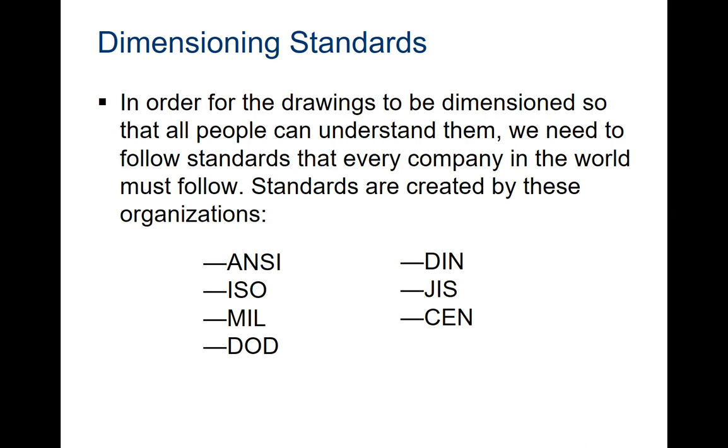That's just one example. So we have these different particular organizations. We're going to talk about a few of them and then we'll move on. So the first one is ANSI, the American National Standards Institute. Again, it's mostly engineering standards in North America, universally accepted set of rules. ISO is the international organization. This is worldwide. There are a lot of countries that participate in this. America also participates in ISO for a lot of things, but again, it's just an agreed upon set of rules.

Then we have the DoD, or the Department of Defense, and the military standard. So the DoD and military standards are going to be used obviously by the military and the Department of Defense, but also by any corporation or company that makes things for the DoD or military so that they have agreed upon sets of standards. So if company 1 is making something and they say it's going to be 1 inch in diameter, and company 2 is making something that has a hole for that part to fit in, it will actually fit. Then we go on to just some of the other ones. There's the German Standards Institute, the Japanese, and the European Institute. So again, it's just a set of rules followed by people agreeing to this set of rules.

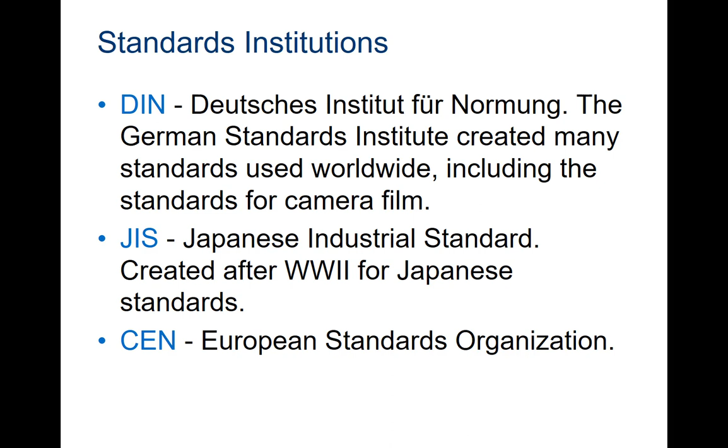Let's get back into actual dimensioning. So we have some components. You should be very familiar with these. We've got our dimension text, which is just going to tell us how big something is. Your dimension lines, which are going to be on either side of your dimension text. There's going to be an arrowhead at the end of the dimension lines to indicate, hey, the dimension starts and ends here. And then finally, there'll be extension lines that run from your dimension lines down towards the object being dimensioned but not touching it to specify that this is the part perimeter where the dimension is actually starting.

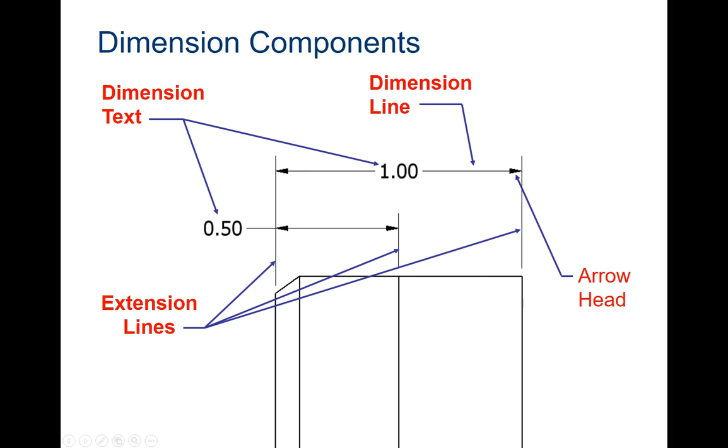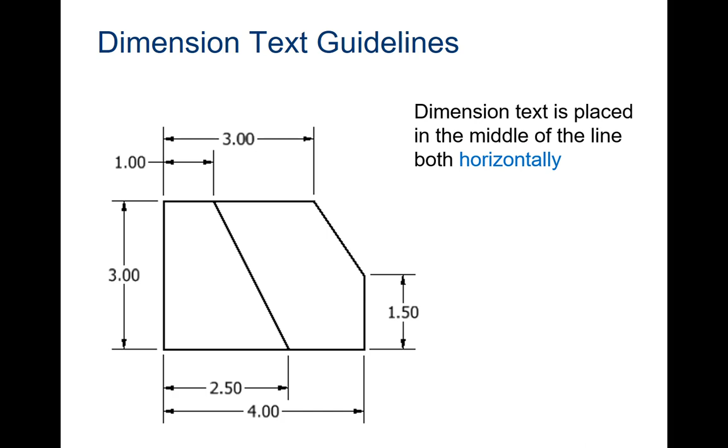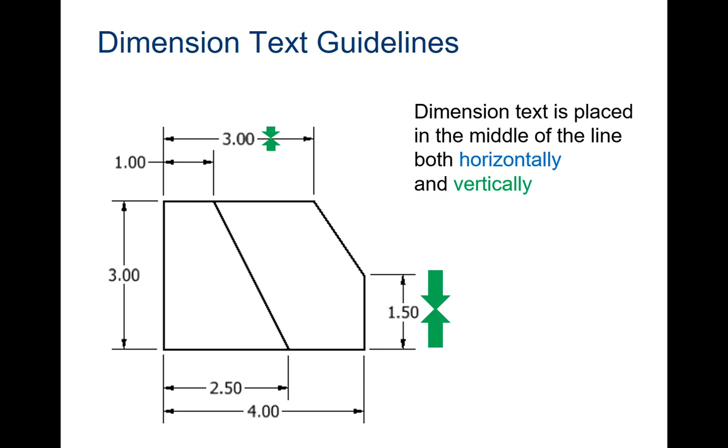Some of the guidelines for text. The text should always be in between the arrowheads, both vertically and horizontally. It can go outside of the arrowheads if the text is too large. So like here, this one is too large to fit inside of its arrowheads, so it can be placed outside the arrowheads with a little extension line right here indicating, hey, this number belongs with that dimension. Right, like I just said, the text should be in the middle horizontally and should be in the middle vertically. This just keeps things consistent and neat. Otherwise, you end up with text all over the place and it just looks very, very hard to read and very messy.

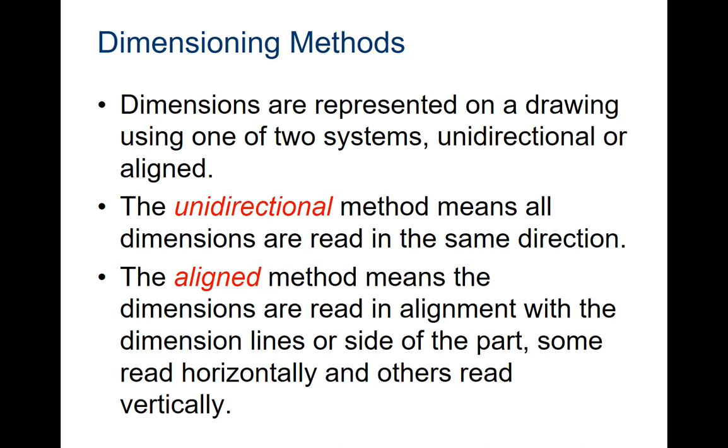Okay, now we have been so far only using unidirectional. We can put the text in our dimensions in two different ways, unidirectionally or aligned. So in unidirectional, that means that all of the numbers or the text is running left to right or up to down in all parts. I prefer unidirectional, the way that we read, running left to right. Some people prefer other methods. The aligned method means that the text is aligned with the direction of the arrowhead. So it could run left to right or up and down. And I'll show you what I mean here.

So here we have unidirectional, where all of the text is running left to right, no matter what direction the dimension is. So this dimension is a right to left dimension, and this is an up to down, but all the text is running left to right. Over here, on the same drawing, if we look at our height text, they're turned 90 degrees, and they run along the same direction as the arrowhead. So they're aligned with the arrowheads. It's a matter of personal preference. For our classes, I would prefer, unless I specifically tell you otherwise, that you use unidirectional. It's just, in my opinion, easier to read.

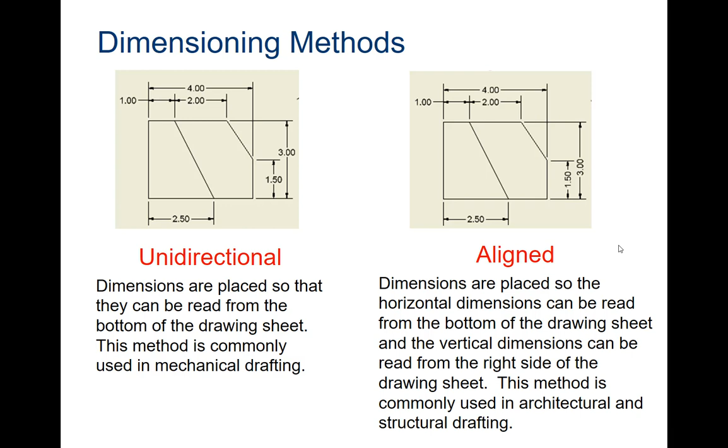You'll remember that there are a couple different types of dimensioning that we do. We do both size and location. So I need to know how big something is. I also need to know where it is located. So size dimensions are telling me how large it is, where location is giving me coordinate points as to where the feature is located on the object.

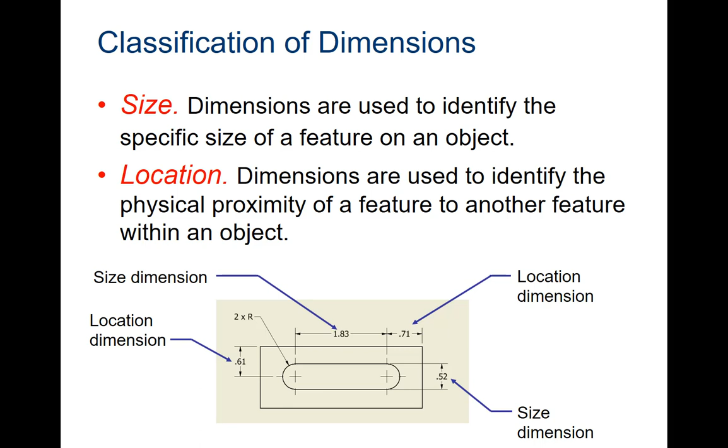So if we look at our example here, we know that the dimension between these two center marks is 1.83. That is a size dimension, but I know that this center mark is located at 0.61 units from the edge. So that's a location dimension. You should be familiar with these. We've been using them a lot. Now we're going to go on to some specific names for the way that we dimension things.

So we have chain dimensioning, and this is where we dimension from one feature to another. It's commonly used, but there are some problems with chain dimensioning. So in chain dimensioning, and here's what it looks like, you start at, say, the left edge, and you do a dimension, and then you dimension from that point onto the next one, and from that point onto the next one. So you get this like 0.5, 0.5, 0.5.

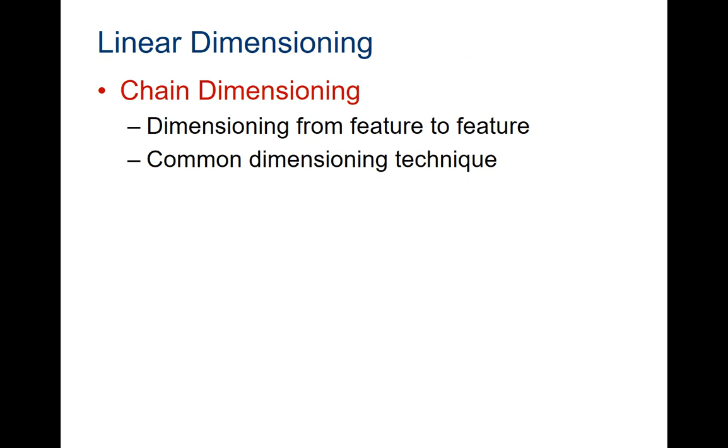The problem with this is say that this first dimension is slightly off. It's supposed to be 0.5, but it's 0.9. So now our next dimension is going to also be off because we're measuring it from this edge, which could be inaccurate. So the inaccuracies accumulate and build upon each other over time. We could end up with this entire part being way too short or way too long because we've just added on to it.

Another form of chain dimensioning is where you give the overall dimension and then you chain a few of the dimensions inside. We've used this one quite frequently. This will eliminate some of the manufacturing inaccuracies because we know what the overall should be. We're not going to have the entire part be too small, but we still can get some inaccuracies, just not nearly as many. So if you're using chain dimensioning, you should be using method 2. I have taught you guys to always include an overall width, length, and height. So you should have a default of using this method too.

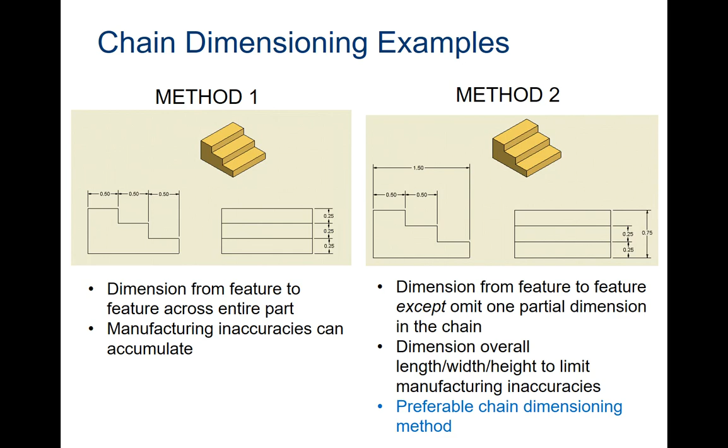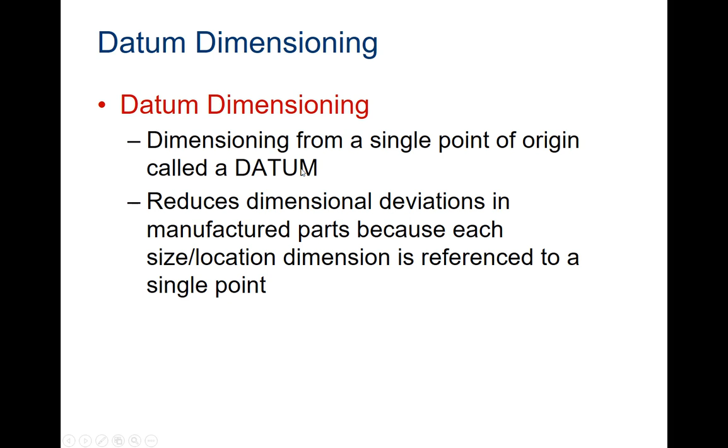The next dimension type we have is called datum dimensioning. And in the case of datum dimensioning, we are dimensioning from a single start point. So say like the left edge of a part. All of our dimensions will emanate from that part. This is good because you're not going to have manufacturing inaccuracies. You might have one dimension that's wrong, but not any two that are going to build upon an error. So this is a good way to do dimensioning as well. The datum is the name we give for that point where you're going to start all your dimensions.

And let me show you what this looks like. So in this case, we are saying that this corner right here is our datum. All of our dimensions are going to start from this point. So you can see I've started all 3 of my width dimensions from this edge and all 3 of my height dimensions from this edge. So all the dimensions emanate from a single point. They aren't built upon each other.

So if we make a mistake, say with this first dimension here, this next dimension and the third dimension are still going to be correct. This cut here and this cut here would be right. It would only be one that would be inaccurate.

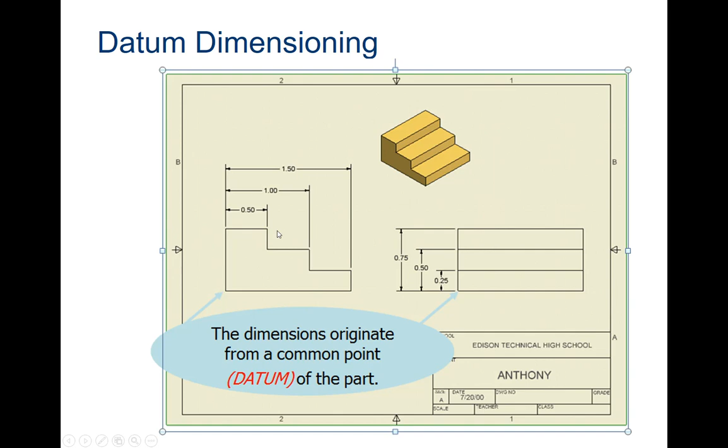Okay, here's some of the dimensioning symbols. We're going to talk about each one as we hit it. You should be familiar with most of these symbols. The degree symbol, reference symbol, diameter and radius, we use those a lot.

Our counterbore and countersink, which we'll talk about when we get to the hole notes in 7.2, along with the depth symbol. Remember, places means if I'm dimensioning, say, 3 or 4 holes on a part, I can just dimension one and say times or places 3. So I would know all 3 of those holes have the same dimension.

And then these dimensions up here are not commonly used. We probably won't get to them, except for the plus and minus. Okay. Let's talk about a couple of the special types of dimensioning and situations that we haven't done yet this year.

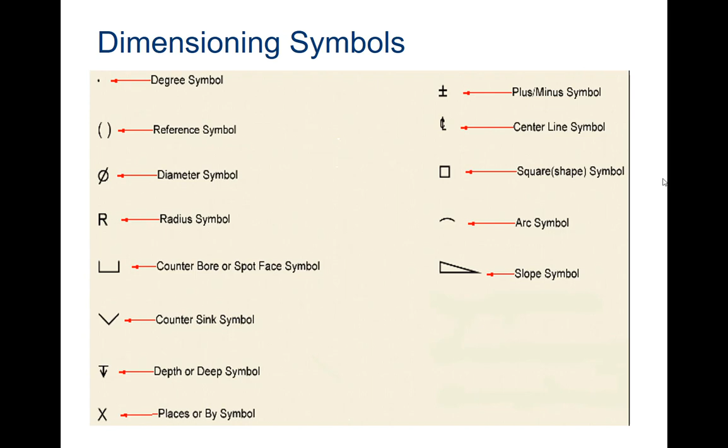So angled surfaces. There are 2 ways in which you can dimension angled surfaces. I have taught you how to do one of them. I've taught you the coordinate method. You can also use the angular method. So in the coordinate method, instead of trying to figure out what the angle of this angled line is, we're just going to say, hey, it starts at this

point. So I know it starts at 0.88 from the left and 1.0 from the height, and it ends here at 1.75 in length and 0.5 in height. If I just start and end my lines at those 2 points, my angle will be correct. So that's one way to do it.

The other way you can do it is by actually specifying the angle. So we know that this is where it starts along this edge here, and this is the actual line. I just measure the angle between the two and I specify that angle. Either method is fine. I don't really have a preference. I tend to use coordinate just because it's a little cleaner looking, but either method is fine.

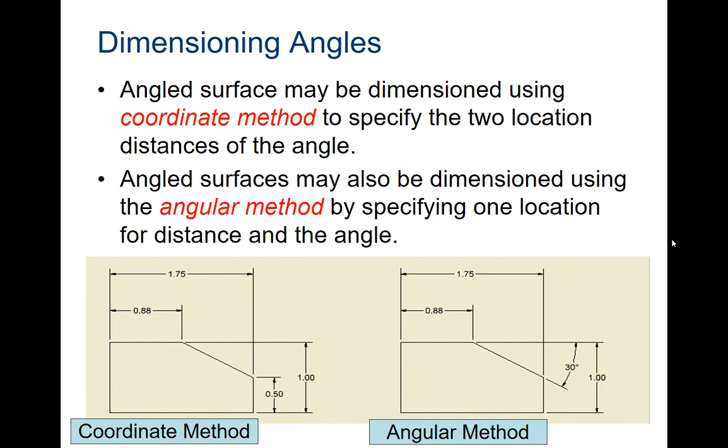All right, now we're going to talk about dimensioning chamfers. Again, there's a couple of ways to do this. You can use the angle method that we just talked about, or you can have Inventor tell you the degree. So 45 degrees times what the length is, and then you can just plug that stuff into the chamfer feature.

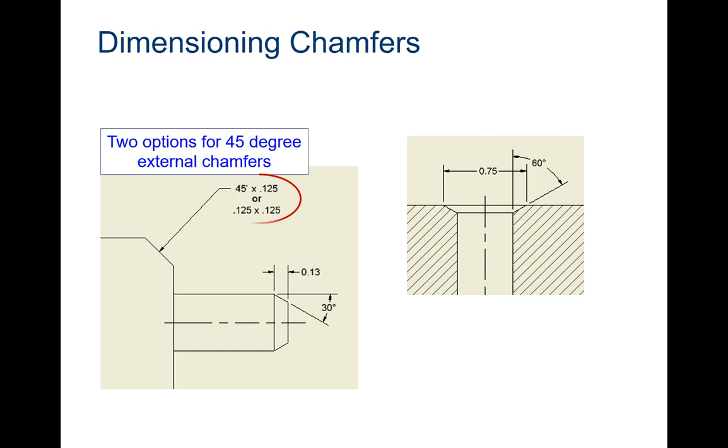So let's look at a couple of these and how to read them. So there it is telling you it's a 45 degree with the dimensions, and here it's telling you the other degrees with the dimensions, and these are the interior degrees with the chamfer dimensions.

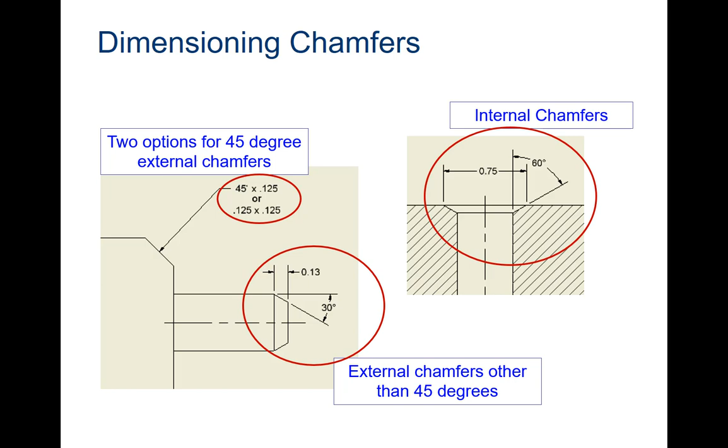Next we have arcs, and this is a lot of information. Basically, it's just saying that we are going to dimension arcs. It's basically saying that we are going to have center marks and radiuses or diameters specified. Let's just look at some examples so you can see how it's done.

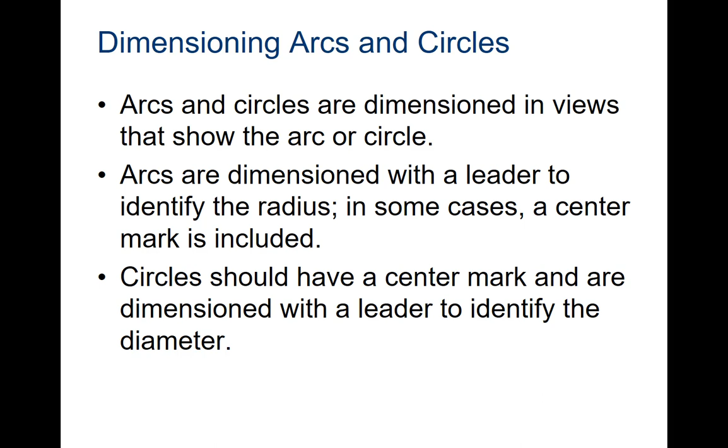So here we have a little object that's got 2 arcs and what would be a circle. Let's look at this big one here first. We've got a very large arc, almost a half circle, and there is a center mark placed in this. So make sure that you put your center mark in. And then we're just measuring the radius off of that center mark. Remember, the capital R is radius.

On these little arcs, which could be an arc or it could even be a fillet, we're just going to put in the radius, right? And again, when you're dimensioning things, if you just hover over it, like right about here, your arrowhead for your mouse is going to turn to, again, I believe it's a circle. You click and drag out, and it will give you the radius for you. You don't have to try to remember it or calculate it.

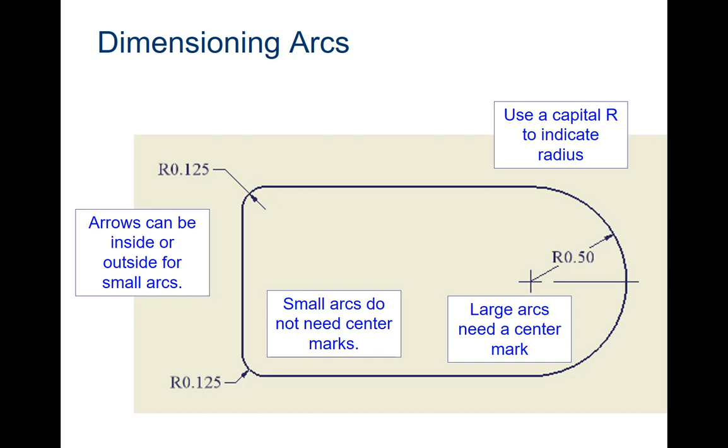So it's pretty simple. The same thing is going to be done on fillets and on internal fillets. So in this case, we put center marks in because these arcs are pretty large, and we just clicked on them and dragged out, and it gave us our radius. Remember, the capital R is radius. So this is the radius in inches.

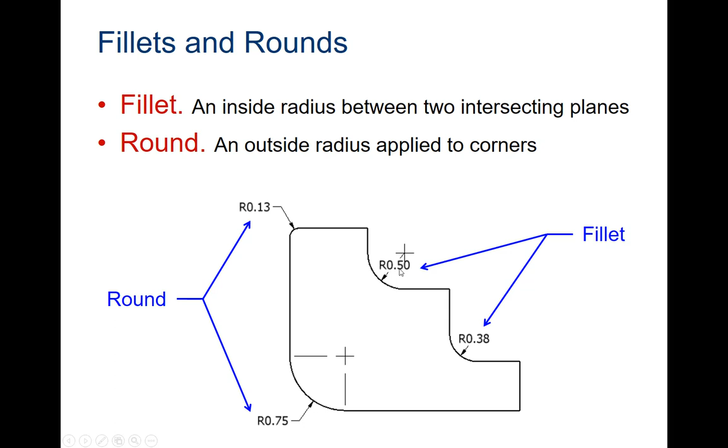Now, when we are dimensioning full circles, you must put in center marks. And remember, there's an annotation feature on the drawing file that allows you to do that. You just choose it and hover near the center. It turns green, and you click it.

When we are dimensioning our circles, all you have to do is choose the dimensioning tool. You'll hover on the edge of your circle and click and drag away, and it'll give you the diameter for you. Full circles, we're going to get diameters. And then in this case, we've got a diameter along with a depth. That's what this little down arrow means. And then right here, what we've got is just a positioning telling us that it's 1 inch between these 2 circles.

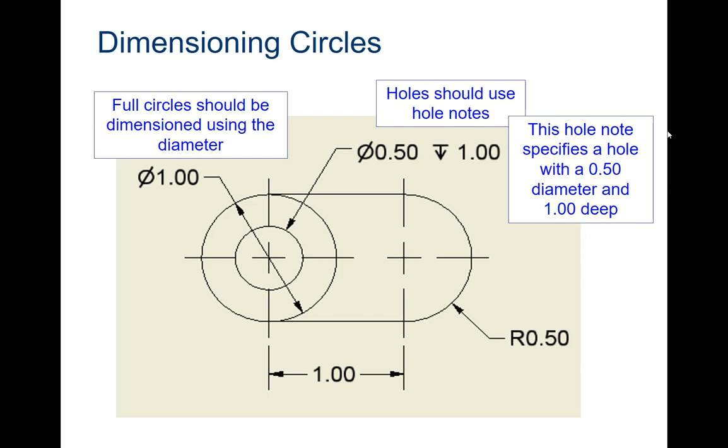Another way to do circles, if you've got a lot of them in like concentric circles, is to turn them sideways and do a dimension such as this. You could do leader lines out telling us the dimension of each one of these circles. That would be fine. But if I look at this one, I could do the dimension of each one of these circles, and then along the top, I could do a width, and that would be all the dimensioning that I would need because I would know how big each one is around and how deep each one is. And if I had this drawing, I could just draw this shape right here, put in a center mark, and revolve it to make it very, very simple.

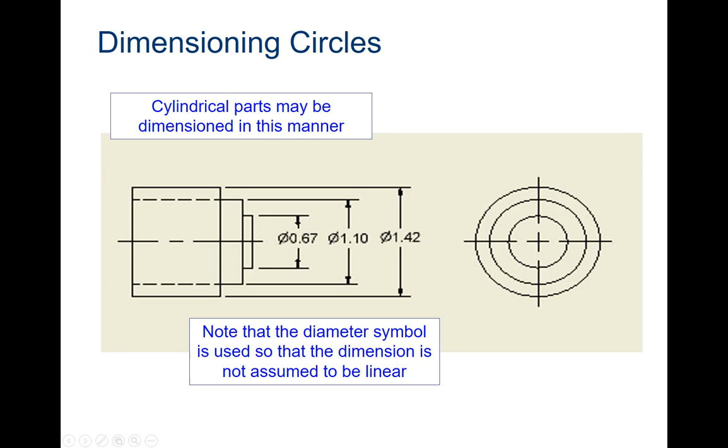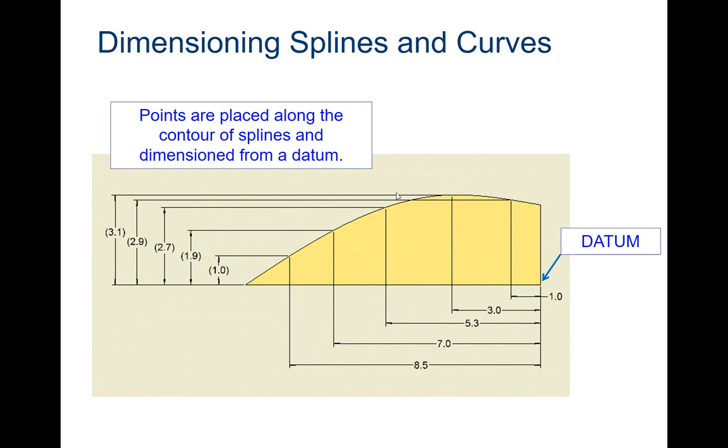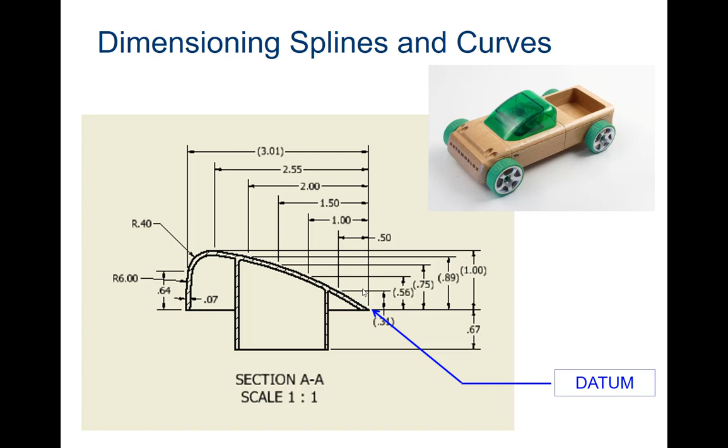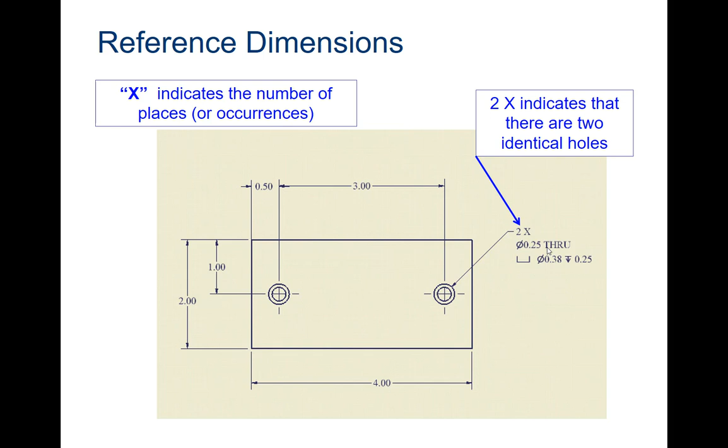Go ahead and start on activity 7.1. There is a second video to help you refresh yourself on how to do dimensioning on objects and also how to add in additional sheets. So please watch that. That's around 6.5 minutes in the video. If you don't want to watch the whole thing, please check out that.